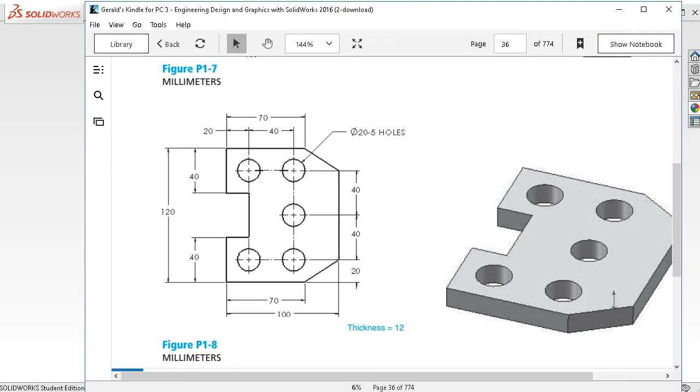All right, the other thing is we have a pattern even though one of the holes is missing. If I generate a pattern, that's going to save me a lot of the drawing, a lot of the relations, and building those items out. So I'm thinking I will go with the cut extrude as a separate.

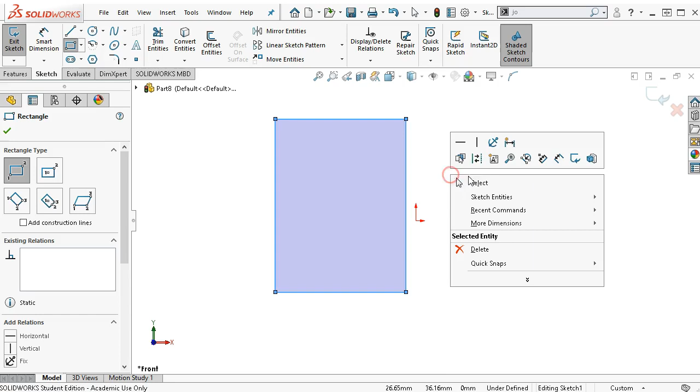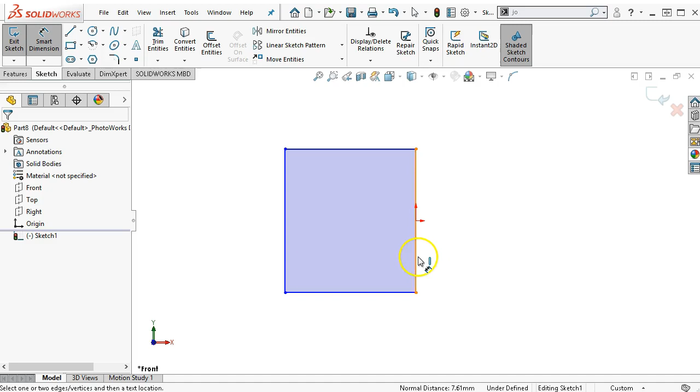So let's pick up the sketch, and in this case, since I'm going to place the rectangle at the origin off of the side, I'm going to just sketch it out into open space. Select the origin, hold down the control button, select the line, and then this is going to become my midpoint. Dimensions, we'll go 120 on the height. We'll be at 100 on the width.

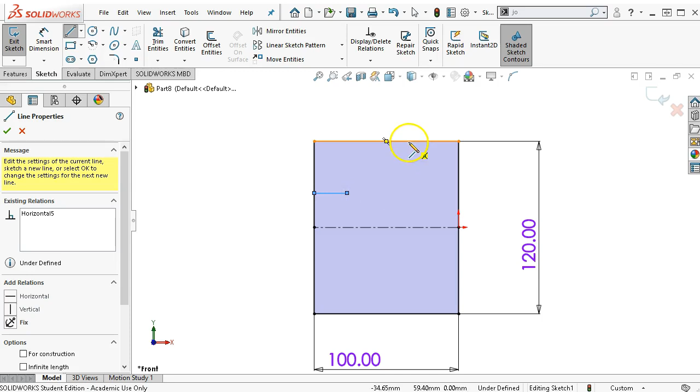And then I'm going to set up for the center line to just go through the middle. And I don't always have to connect the items that I want to mirror. So I'm finding those coincidences. I'm looking for those little yellow boxes. We're getting that in position.

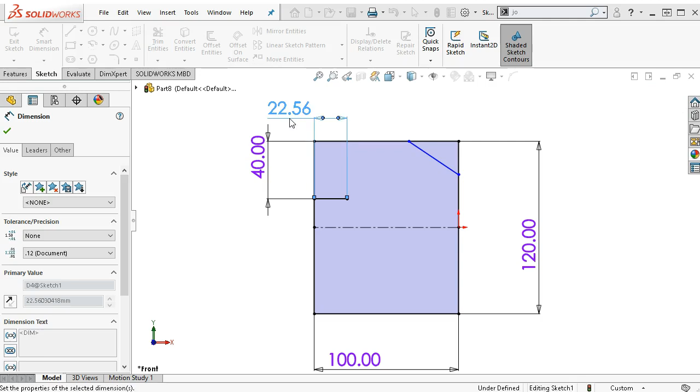This one was dimensioned off of the edge at 40. It also goes, well, we're making an assumption. The center line appears to go through the center of the circle, so that would be at 20. The point is at 70. All right, and then from the center line up to the point is 40. And those hole locations also go kind of through those points.

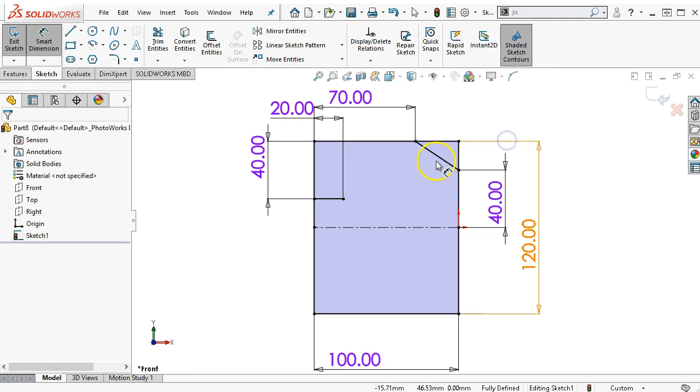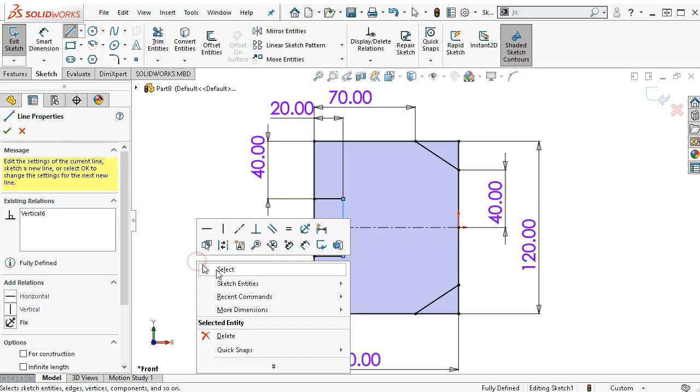So in this case, I only want the two items, so I'm going to select and control select the two lines, and then control select the center line so that I can mirror those entities. And then the last line will be to connect those two endpoints. Alright, so that gives me enough for the contour and region. We'll go into the boss extrude.

It has a thickness of 12. Put that into place. It hasn't selected anything. We haven't given it a contour. And it is finding the center line, so we're going to pick both regions, both halves. And go ahead and accept.

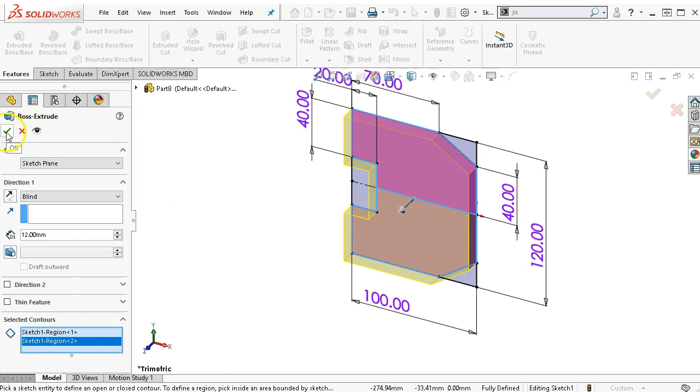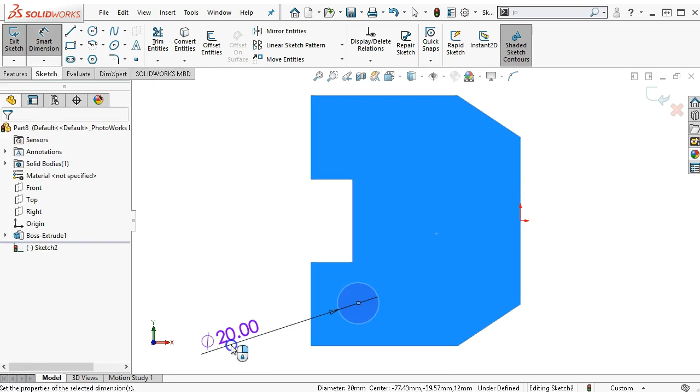And then we'll pick up the sketch. And so this is kind of an interesting relation. I could draw the locations, but we have that other geometry. So let's see, the holes are 20 millimeters, so let me get that dimension on so I have my sizing to start. And that's one of those cases where it showed me 20, but it's actually 19.9500. Yeah, way out there. So let's put in the 20.

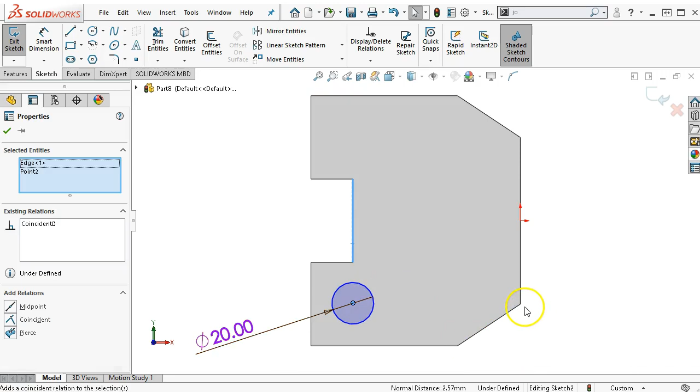And then for the relations, I want to be along that edge. So selecting the edge, control selecting the center point, those will be coincident. Because I had an edge or a linear object geometry, and the point, that's going to be coincident, but when I pick this point and this point, those are going to be horizontal. So again, those kind of different combinations based on the selection sets that you make.

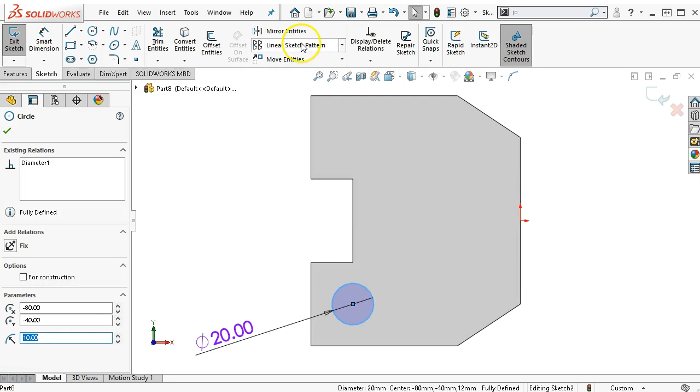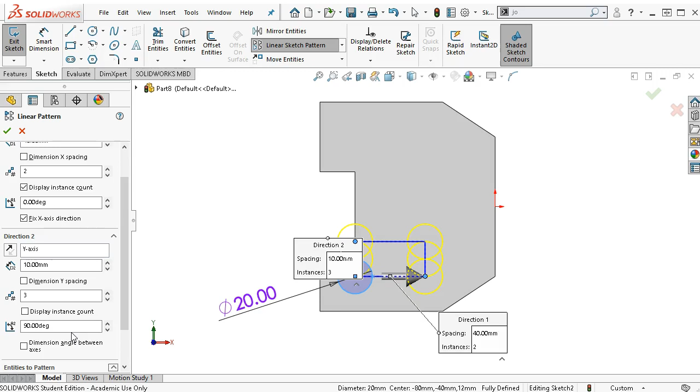Alright, so for my pattern, I have the first instance located, and we're going to go to a linear sketch pattern. The separation is 40. So in X we have 2. And until I add a number of instances, we have 1 row. So I need a total of 3 rows. After I add the additional rows, then it will open up the dimension and I can set to 40.

Alright, so let's take a look at some of the values underneath our linear pattern. If I dimension the X spacing, then I should get closer to fully defined. And the X-axis direction at 0 once it's located. If that's off, I believe it will allow it to rotate. And then also we want to dimension the Y spacing. And then the angle between the axes, we might have to add a vertical, but I think I'd want the vertical rather than really dealing with the angle.

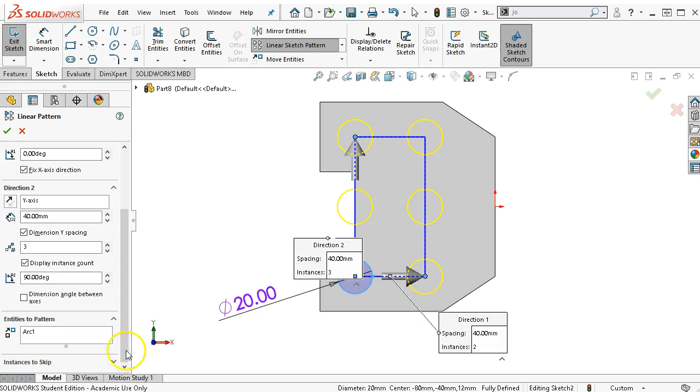Alright, so entities to pattern and instances to skip. So if I go to instances to skip, I can remove that item, but once I remove it, if I decide I need it later, I can't do anything with it. I would have to regenerate the pattern. So my preference is to go ahead and let it participate.

Alright, so we didn't quite, and that's one of the issues with the circular pattern and the linear pattern, is that they don't always go fully defined. So in this case, since I didn't add the angle between the two, then I need to select that center line and make sure that it's vertical.

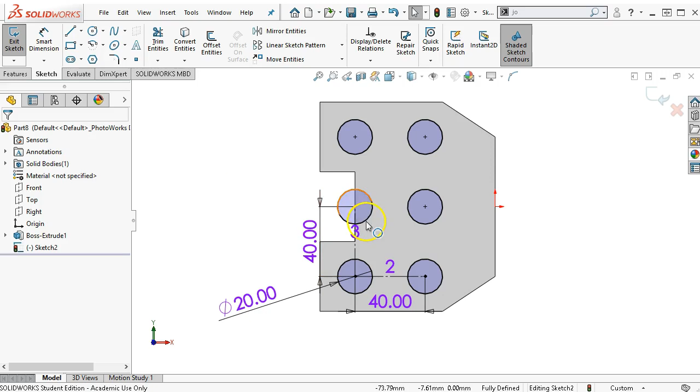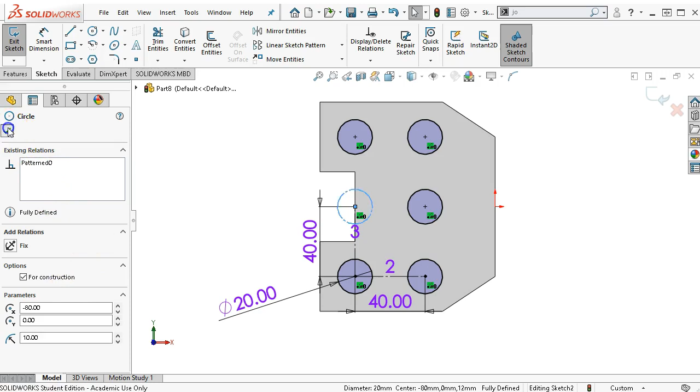Alright, so the instance that I didn't skip that I may or may not ever need, I'm going to highlight it, and because circles do not have construction circles, we have to convert it into construction geometry. So I'm either going to click on the pop-up and set it to a construction circle, or I'll come over and make sure that for construction is selected. Okay, once that geometry is in place, now we're into the features, extrude cut, and we'll go through all.

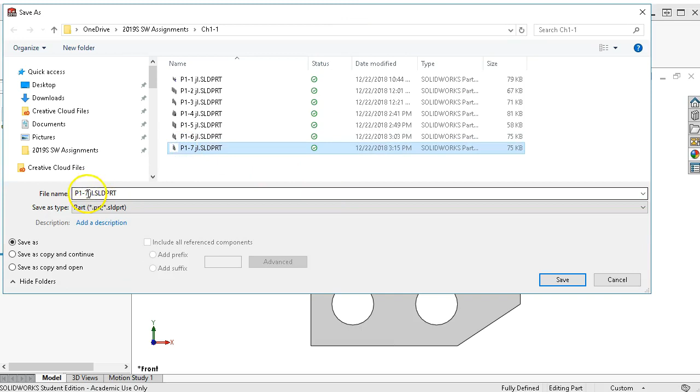So again, anywhere where we can identify symmetry and patterns and take advantage of those tools to speed up the process, we're definitely going to utilize those. Let's go ahead and make sure we save our part, and we're ready for the next one.